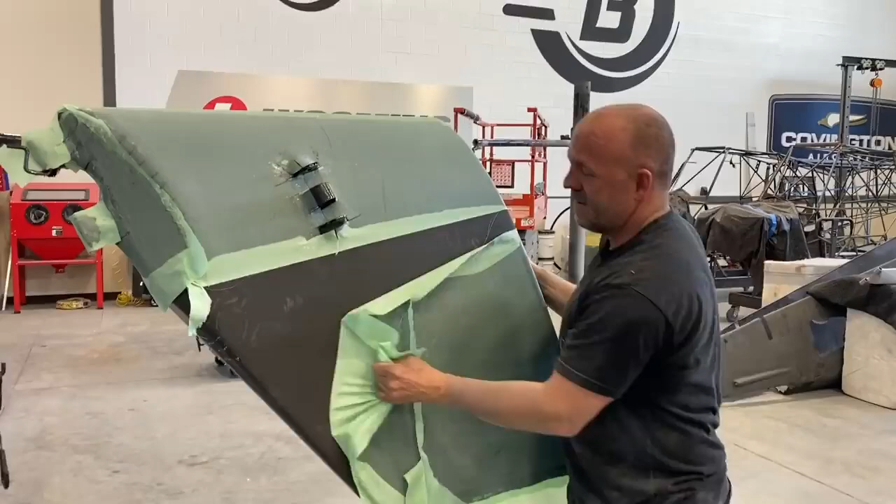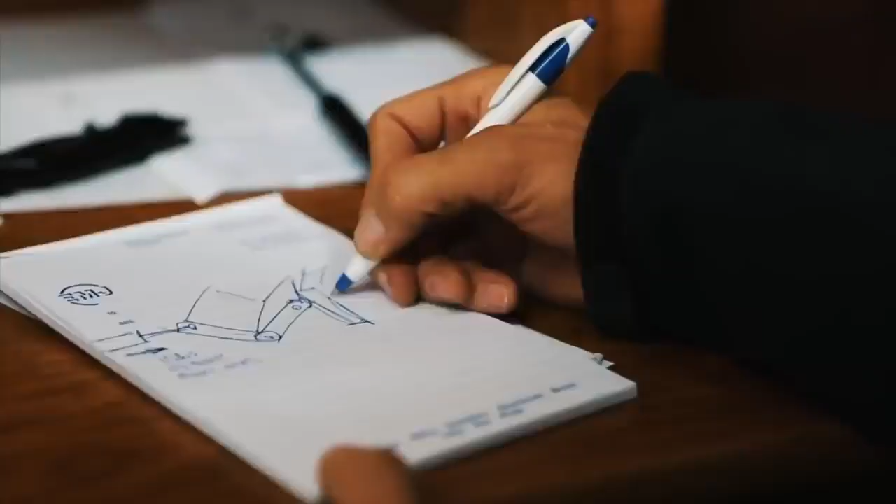This is oddly satisfying for me. It's physics, math, and engineering. Machine it, draft it, build it, test it, break it. Every time something new gets built, the entire world advances. Laying in bed at night, it's designing new parts, designing new suspension, designing new wings.

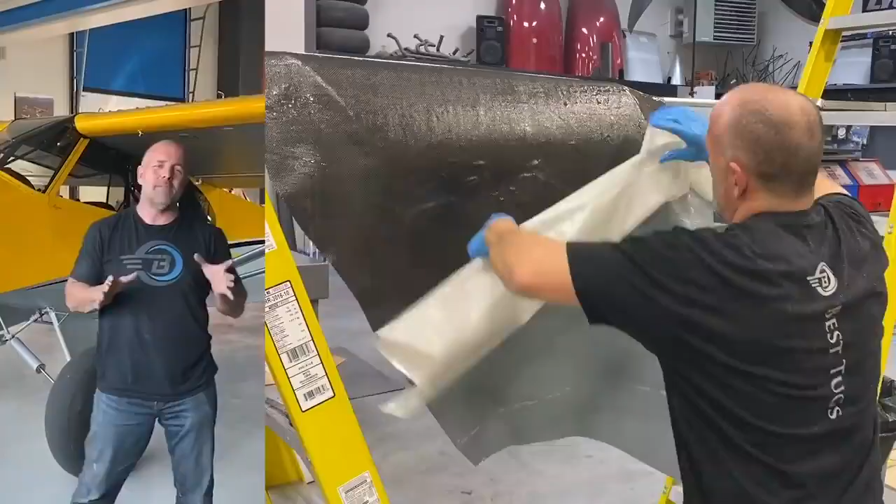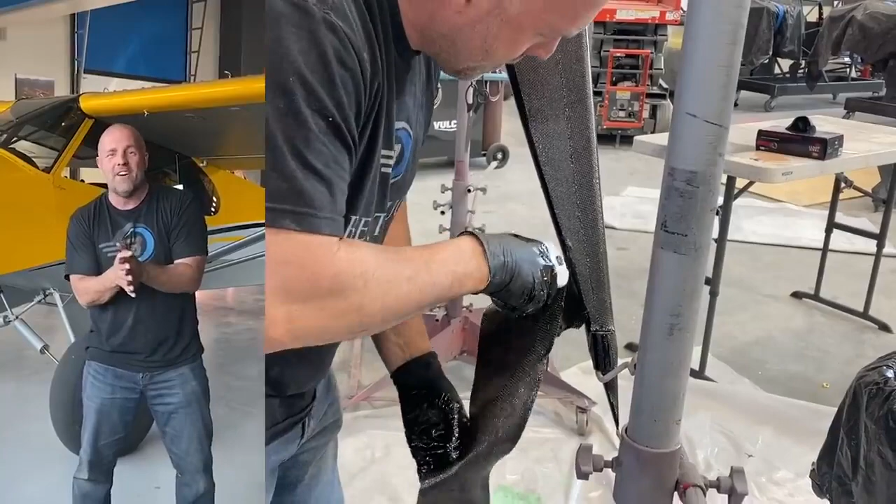Okay guys, right here I'm gonna jump into finishing up some really crazy little mini wings on the front suspension of my Scrappy Cub build. So I finished part of the shape and foam and sanding in a video a couple weeks back, so if you haven't seen that, go ahead and jump back and kind of catch up. I'm gonna pick up where I left off, get these wings built and installed.

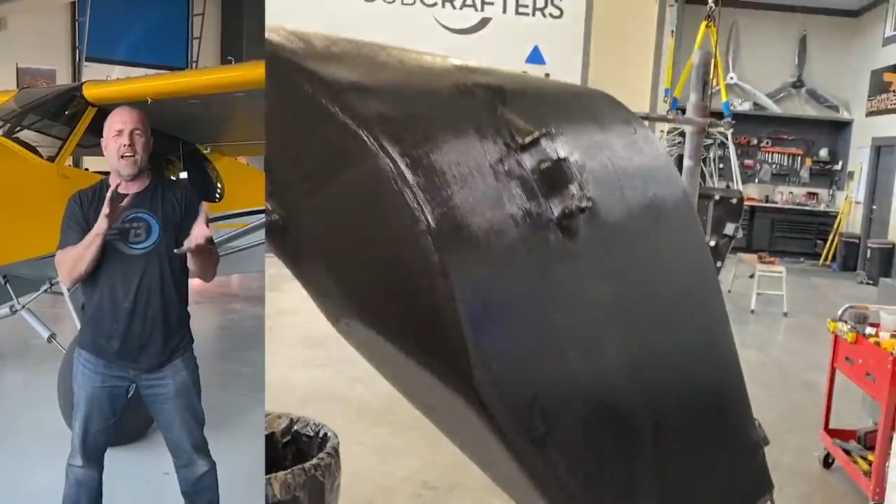Along the way, I'm gonna apologize in advance. I kind of got behind on these videos, and so they're gonna kind of jump around. I'm gonna try and keep them in a little bit of order, but I was painting parts while I was doing other parts, and other parts weren't painted, so there's gonna be a little overlap of stuff you'll see that hasn't come out in a video or was in a past video. I hope you can bear with it, because we'll get through the next couple videos and they'll all come back together. So I hope you like it. Let's get back to work.

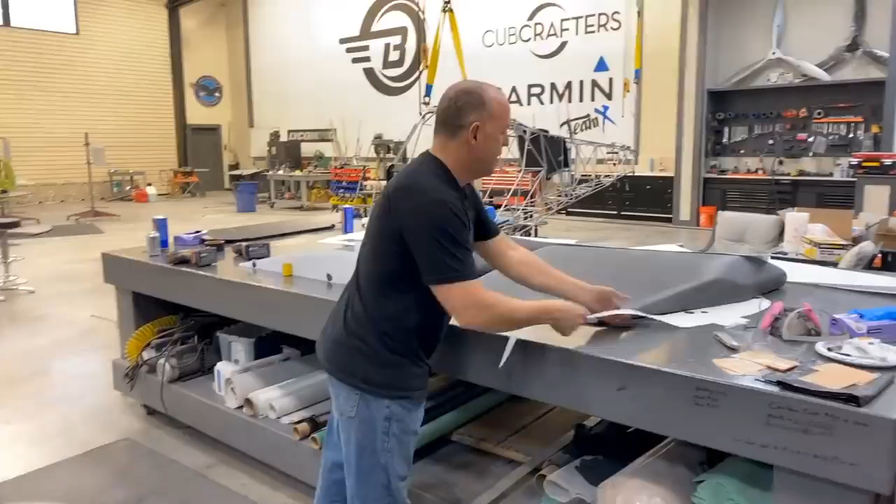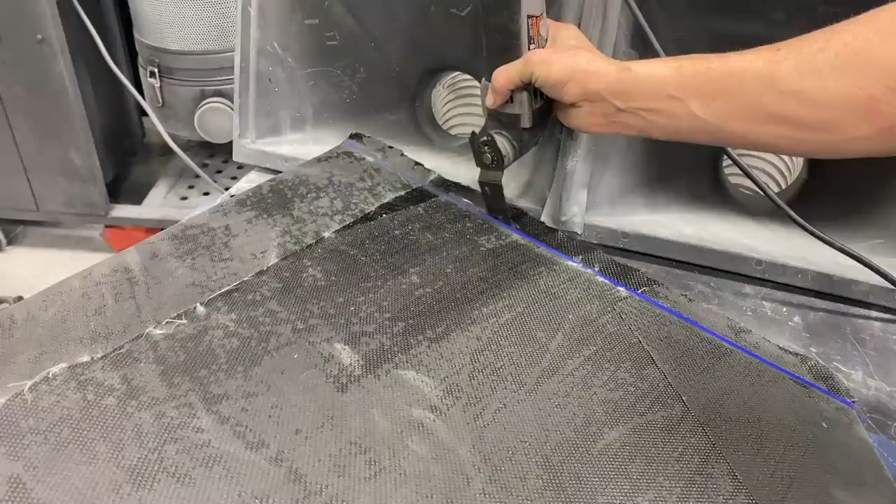All right, guys, here's my mini gear leg wing, airfoil. I'm really excited to have little mini wings. Anyway, I've got to get them trimmed out. I've got to put the metal frame inside these wings now for the shock mounts and the tire mounts.

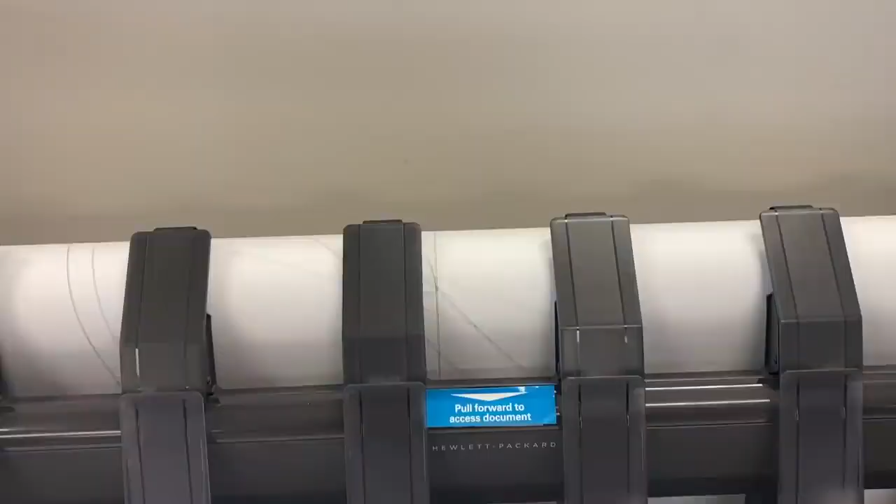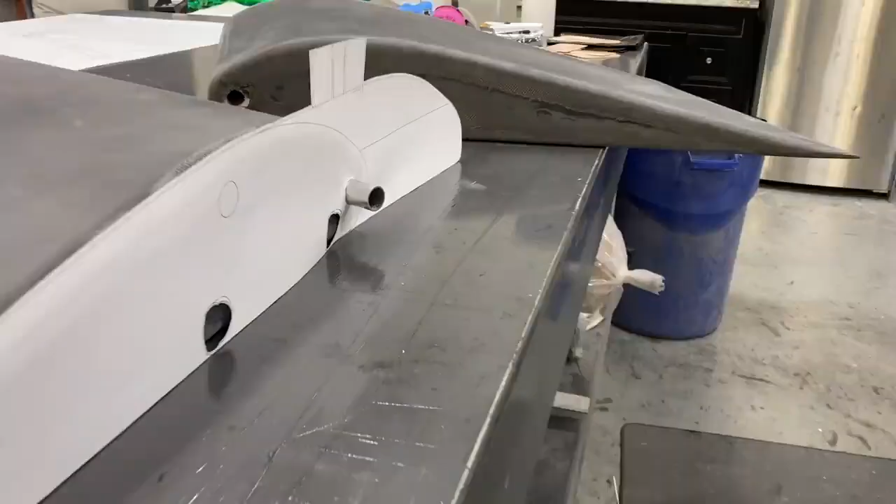Since all of it was done in SolidWorks and I 3D modeled it all, I can now make templates. And this paper I printed out is absolutely exact. I cut it long, but the bottom I cut exact. It's got the pass-through bar I used to hold the plastic foam still going through it right now. And then I use that as my alignment to drag the paper tight and mark it. This is kind of a funny shape, because there's several bars coming into one location here, but I can see each one of them. That allows me to cut a hole and then use a Dremel and chase every one of those funny arcs exactly for how the metal will pass out of the carbon fiber mini wing.

So I've got a template for this side. This looks a little funny, but if you think about a computer, it 3D models a flat plane. So this line is this side of the wing, but since the gear leg is raked forward, this line is actually representing that side in a perfect 90-degree plane. So this is showing kind of an angle across to the back. This is representing the shock mounts, but when I put a template on the other side of the gear leg, I can put a line between the two and the shock mounts will be here. I could get it pretty close that way, but not absolutely perfect.

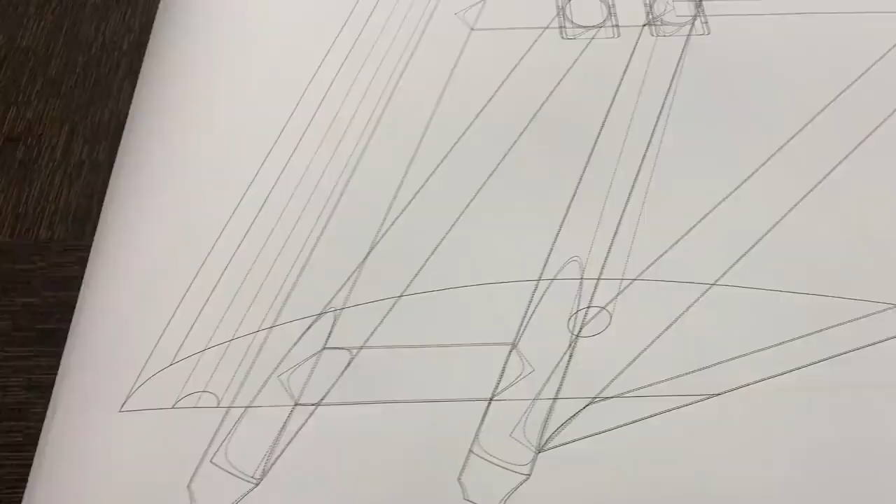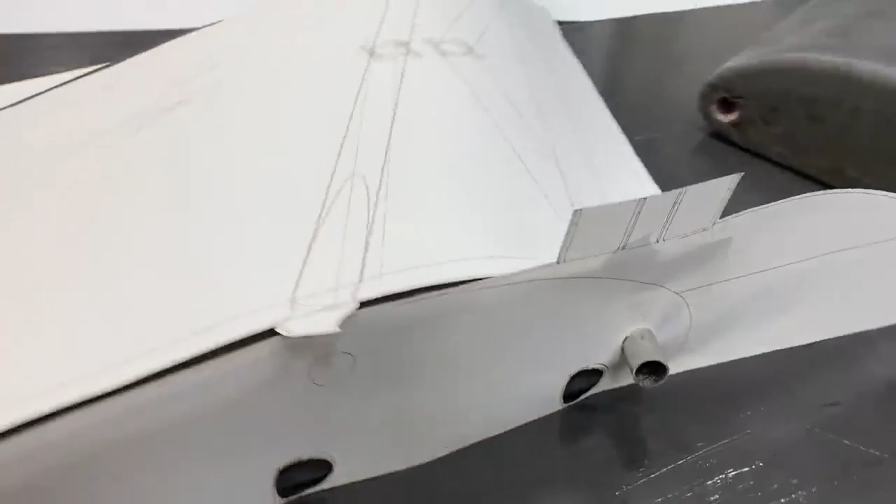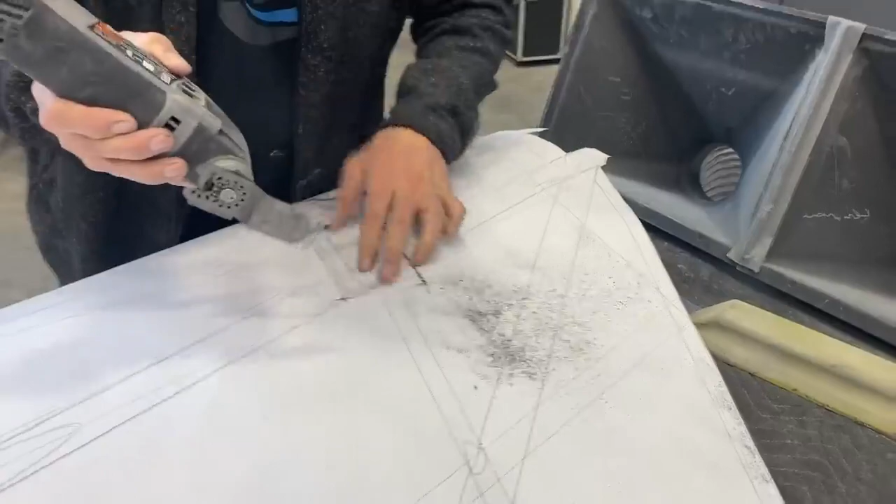So I've got another template. This one is top down, showing the metal frame inside the mini wings, so that I've got the structure for the shocks and the gear. What this is showing are the bars that pass through, the holes you saw on the other template. This small side of the wing where the tire is has two pass-throughs, but you can see here my shock mounts. So I'll cut out this paper, and it's already designed and arced. When I lay this on the carbon fiber, instead of doing a flat plane looking straight down, I actually did a contoured plane. I can set this right on the carbon fiber, trace it around, line up the back edge, the front edge, the two sides, and exactly cut out these little squares where the King Shock perches come through the mini wing.

So I got that template, a top template, and a bottom template. I'm going to cut them all out, start punching holes. Once I get all the holes exactly oriented, I'll split the two halves apart, pull the mold out of the middle, and clamshell it onto the metal frame of the suspension. I hope that all makes sense. Anyway, I'm super excited, everything is fitting perfect. It doesn't always go that way, but today it's going that way. So let's get back to work. Hope it holds up.

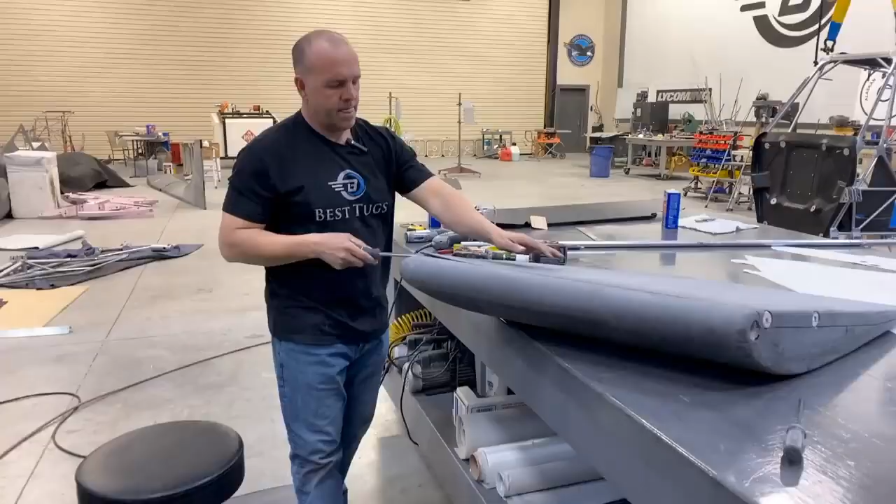That's oddly satisfying.

Oh my goodness, it's gonna get really stormy. You can hear the thunder already.

What are you making? A mini wing. Somehow I got to magically blend steel into the middle of this chromoly, but it's not working.

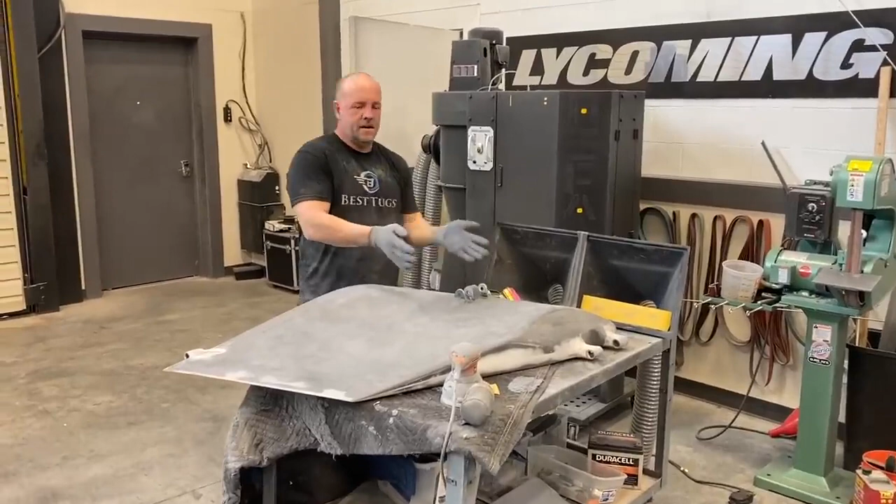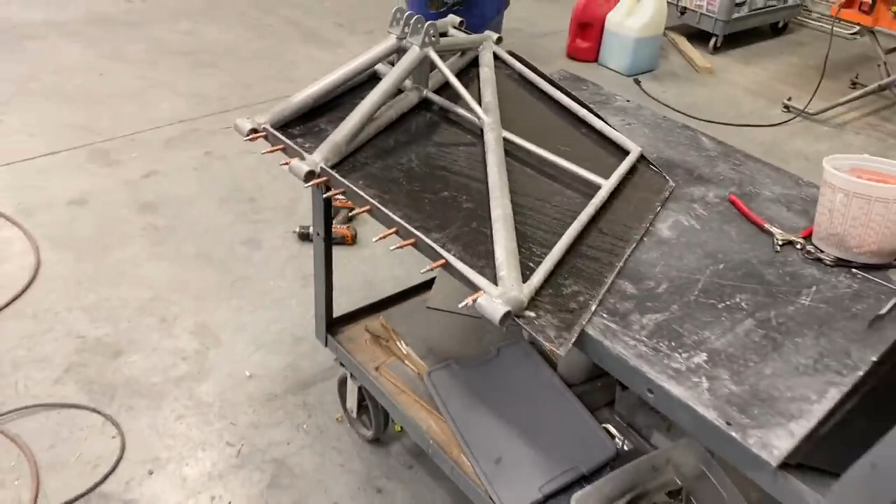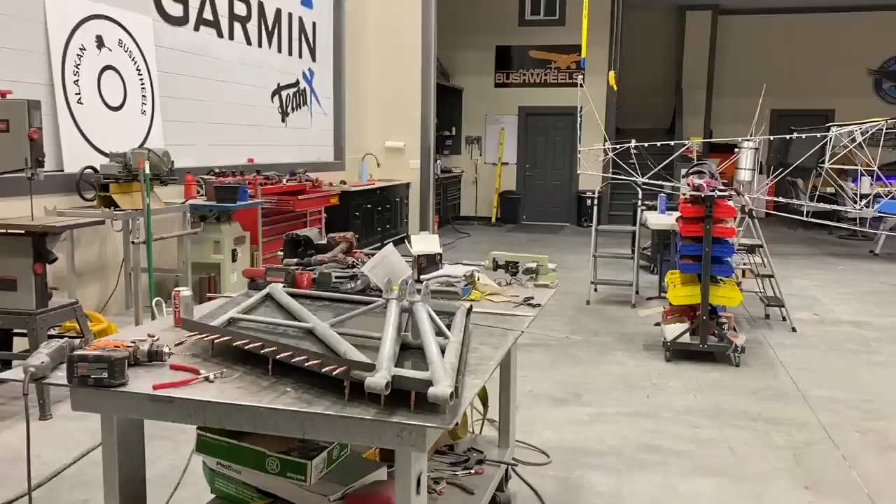All right guys, I've got one done. So what I did is I split it, opened it up. If you look at this end, you can see where the seam is right here. And it's got, what's great, just a trace, really thin, of micro filler to close out that joint. I've got all the sanding done. I microed all of this and sanded it back down, and sometimes you get lucky because you'd think you'd see traces like this. This little place is where all the clecos were that clamped this end back together. So there's a little bit of wave right there, but out in the field it turned out perfect.

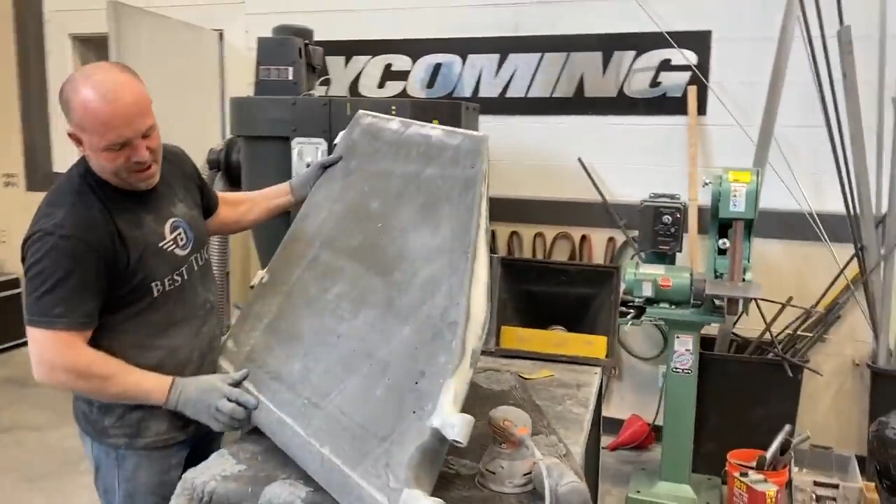The front, same thing. There's no micro left, even though I glazed it all and sanded it all off. The bottom, same thing. The seam was right here. Got a little bit right there, but for an all carbon fiber one-off part, that's probably up there in my top 10 least amount of micro left over after sanding. So I'm really happy with it.

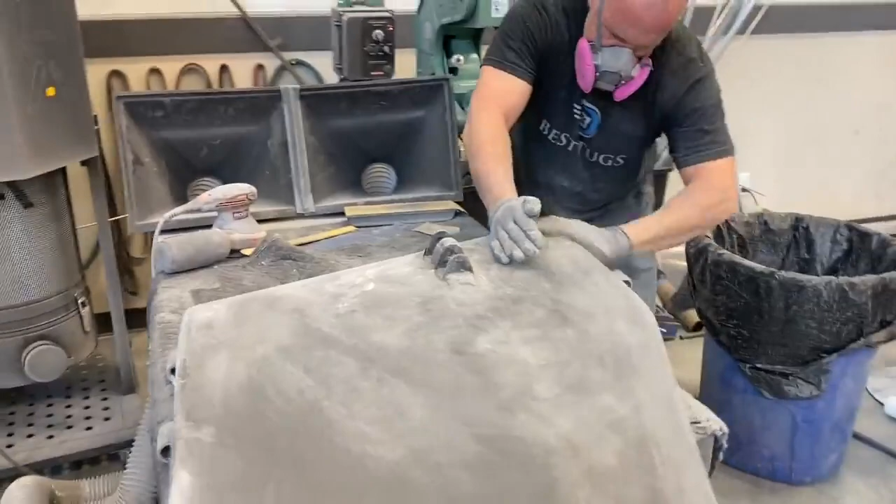It looked so cool when I got it all wet and wiped down that this was going to be a silver part, silver metallic paint. But with all these lines and these crazy rounded curves and shape and the top here, it just looked too cool in carbon fiber. So instead of adding primer and sanding and then building up and painting, it's flat enough, I'm gonna go straight carbon fiber.

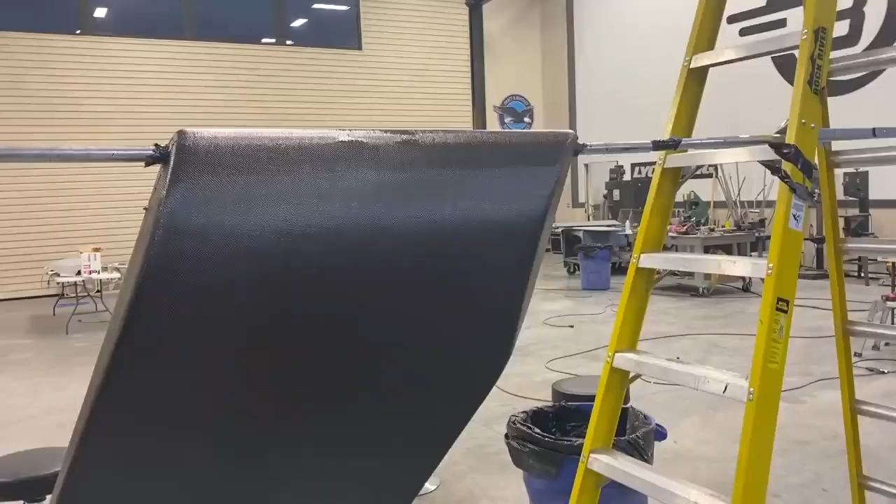So I'm gonna add carbon fiber, 2 layers, on the edges where I have a seam joint. And that seam, by the way, I made an overlap, so they actually overlap and tongue and groove together. So I've got a big plate on the back side of that joint, so that's really a solid joint, and that's all the way around. I did an overlap like this. But I'm gonna go ahead and add 2 layers of carbon fiber to the edges where the seams are.

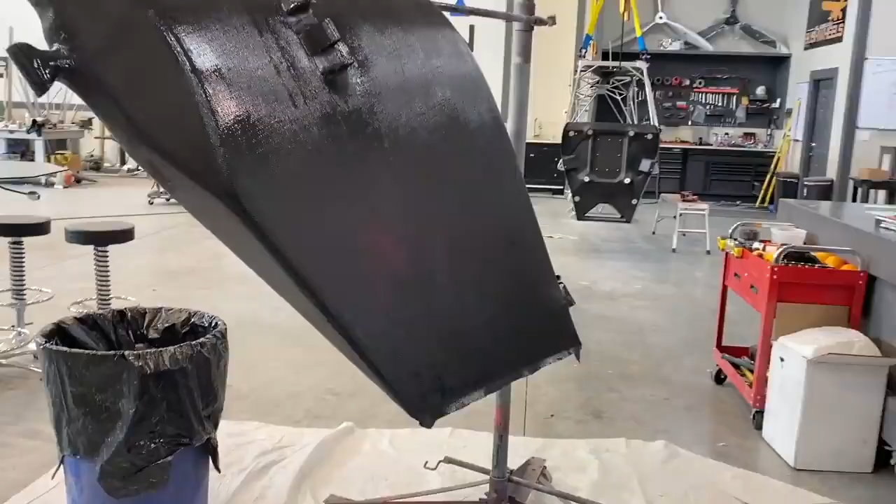And then on the top, I'll add one perfect giant piece, same to the bottom. This little trace of micro here and there is gonna be buried underneath those layers. So then I'll clear coat it, wet sand it, and polish it, and we're gonna see all one carbon fiber part. So it should turn out really good.

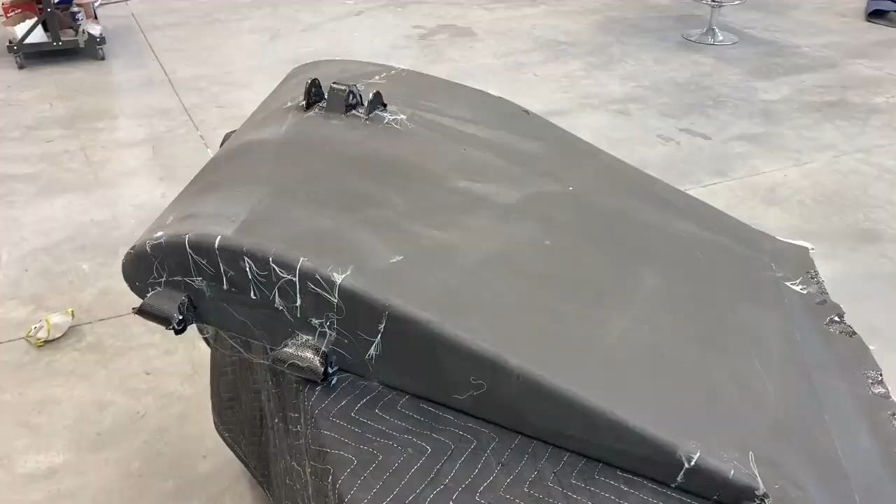I left all this carbon running long over all the parts, and we'll sand that off later, but let's put on some peel ply. The other one's already dry, sitting over there, totally done. So I'm gonna go do finish sanding on that while this dries up. I'm gonna try and shoot some clear on it in the next day or two. So lots to do, back to work.

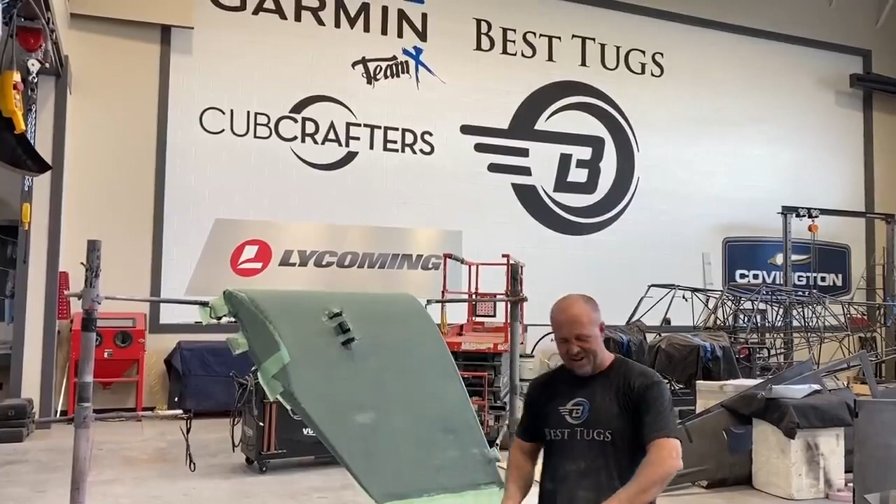All right, I've been sanding for a couple hours straight, carbon fiber, over by my little air vacuum to keep it out of my lungs, and wearing my mask this time. I'm doing better.

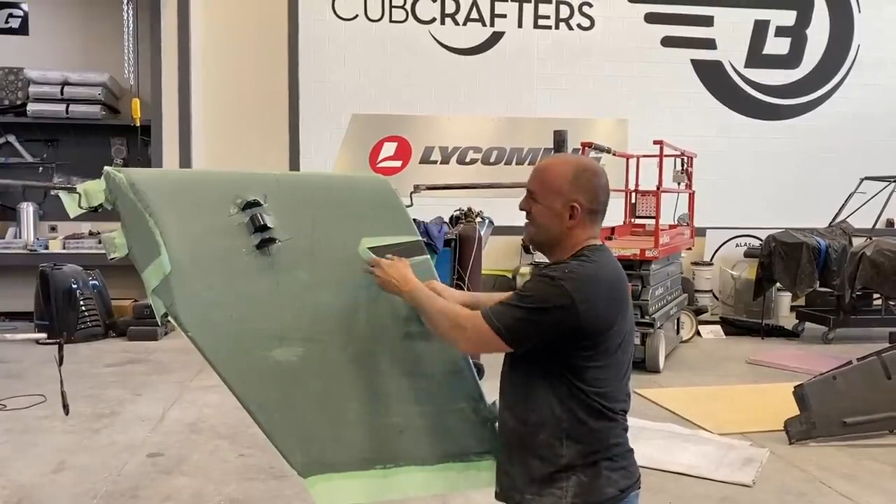Anyway, I've been sanding on the other side of my mini wing gear leg, and I needed a break, so we're opening up a Christmas present. Yeah, we'll get a big piece here. Oh, that's oddly satisfying.

That turned out so good. I think about 5-6 hours sanding on this one. We got maybe an hour left on that one over there. We're gonna be ready to put clear coat on it, so I can't wait to see how this looks. It's got so much shape to it, so I don't know, back to work.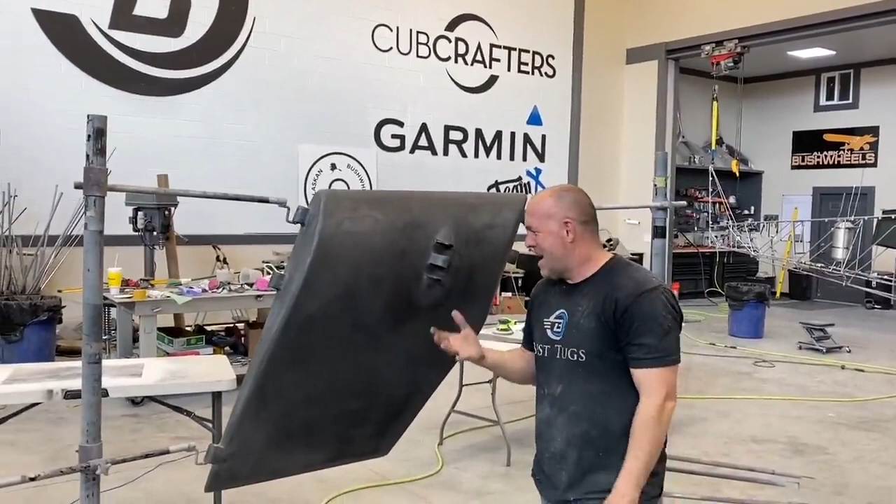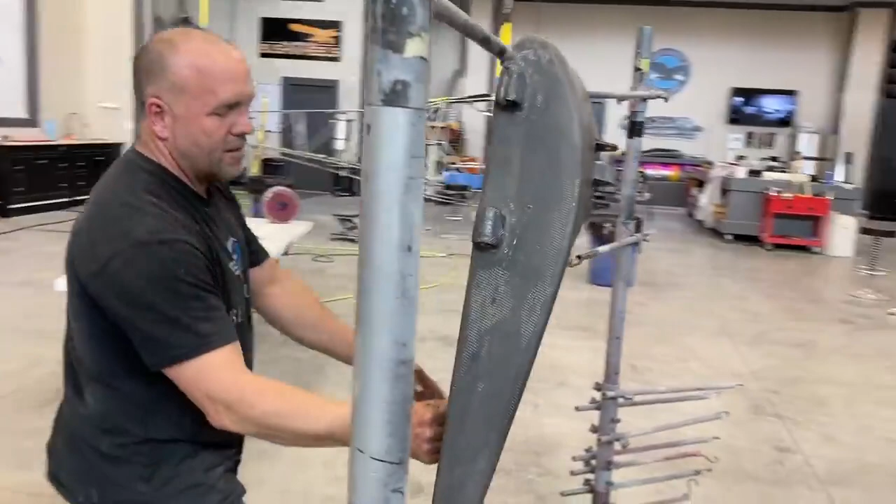I'm super pumped right now. I'm about ready to spray clear on this. It's all sanded. Man, it is a big job sanding carbon fiber. It's such a tough material, but it turned out really cool. I was able to put all the seams on the backside, so this top is one giant wrap. And so I'm really excited to see the movement of the carbon as it twists around the corners. It should be a really cool look, but you can walk around, see the whole thing. A little dust, I got some alcohol, clean it up, but man, it turned out straight. Let's put some clear on it and then get it on the airplane.

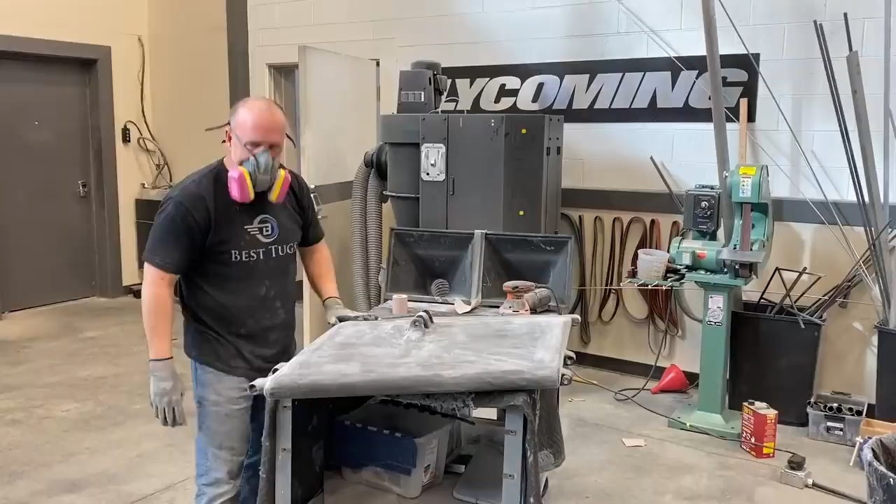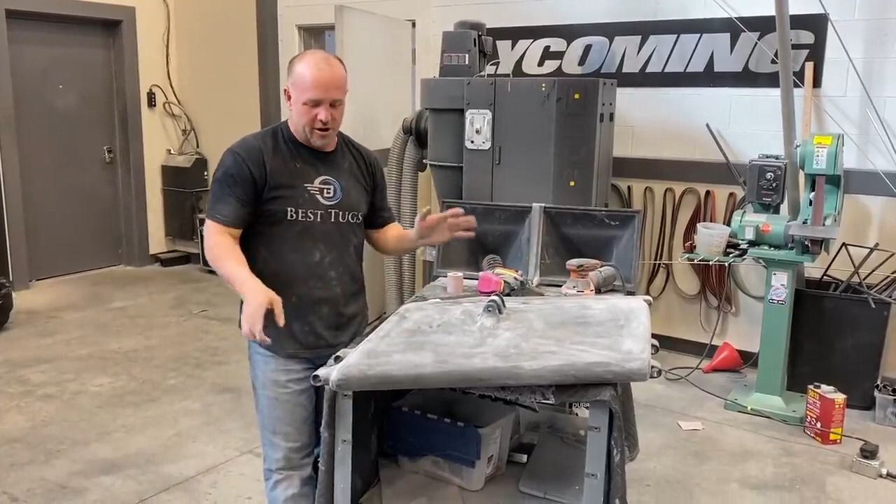Get close. This part, I'm really proud of it, but it is a pain in the butt. I've had to, between putting the metal frame inside and all the mold work and all these funny angles, it's just very time consuming. I wouldn't say it's hard, it's just taken a ton of time. But one of the challenges, because I don't have any room for any error at all, it's not like I can have a dimple and then just fix it with a little body filler. It's gotta be perfect. And I feel like it's gone really well.

I actually didn't need anything other than, I've had to sand it and then put a clear coat down and then sand it and use the clear kind of as a prep body filler. And it's so much harder and hard to sand, and it doesn't work if you had any major imperfections. So fortunately, this one's worked out. You can see kind of what it's gonna look like when I get it all clear coated again.

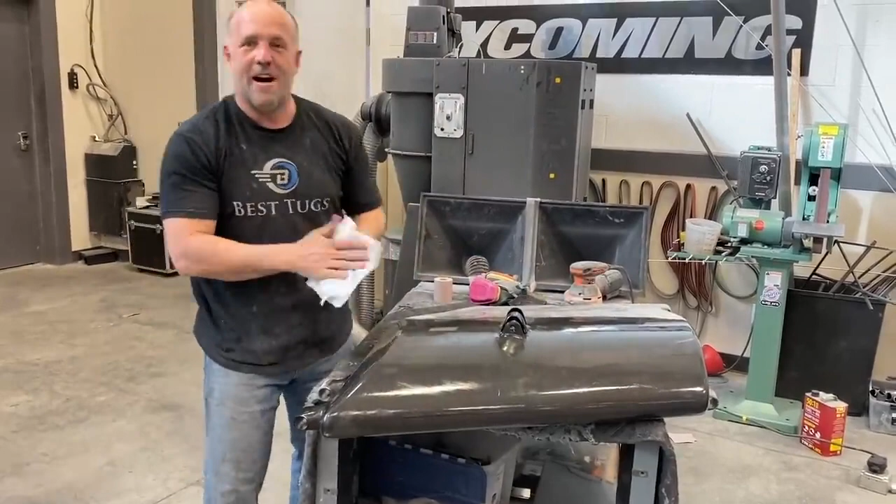I'm really happy with it. But I tell you what, paint is like 1,000 times easier. Sometimes when I'm into it 10 hours straight sanding, I feel like I wish it was just paint. But when it's done, I think it's gonna be really cool being just raw carbon.

Hey guys, this is my first part for Scrappy in a mirrored finish, and I am way pumped. It turned out so cool. I love doing mirror finish on carbon, and this one, I don't know, I'm pumped. I guess just because it's the first one for Scrappy that's now done. I got a lot more to do, so let's get back to work.

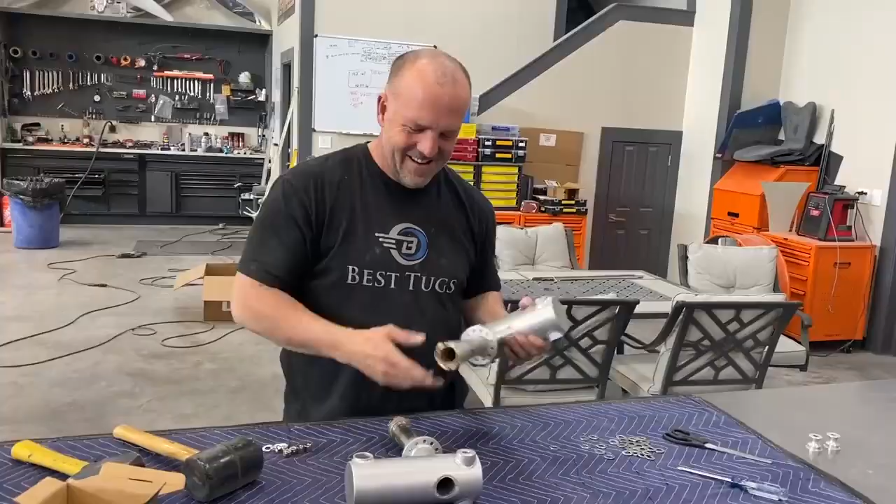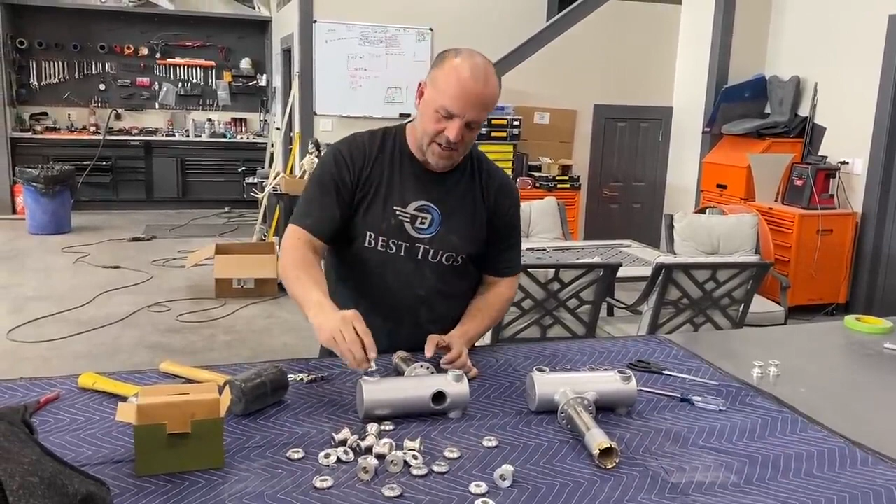All right, guys, so here's the parts we just made. Got this little hourglass shape to it to save weight. And the tolerance is just enough. It should just tap right in with a little friendly persuasion.

Like that. And the reason I've got this done both ways is I got a 1/2 inch bolt going through here, and I just want to stabilize it rather than just out on the outer edge, here and here, for the long bolt that goes through for the gear. I wanted to have it have multiple contact points, so it's going to stabilize with this inside, outer, inner, inner, outer. So there'll be 4 contact points on that bolt. It just eliminates the amount of vibration and play. And anyway, perfect fit.

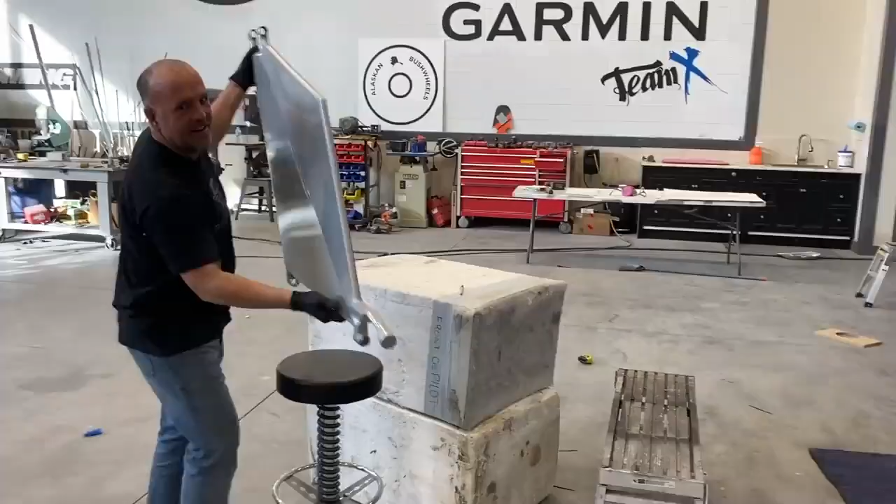One down, one to go. My first A-arm is going on. Could not be more excited. There's so much work to get to here. I gotta put the little...

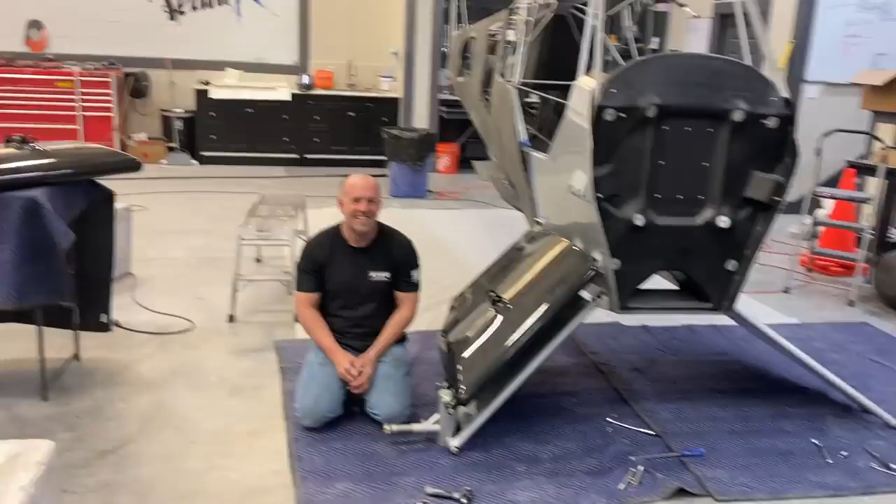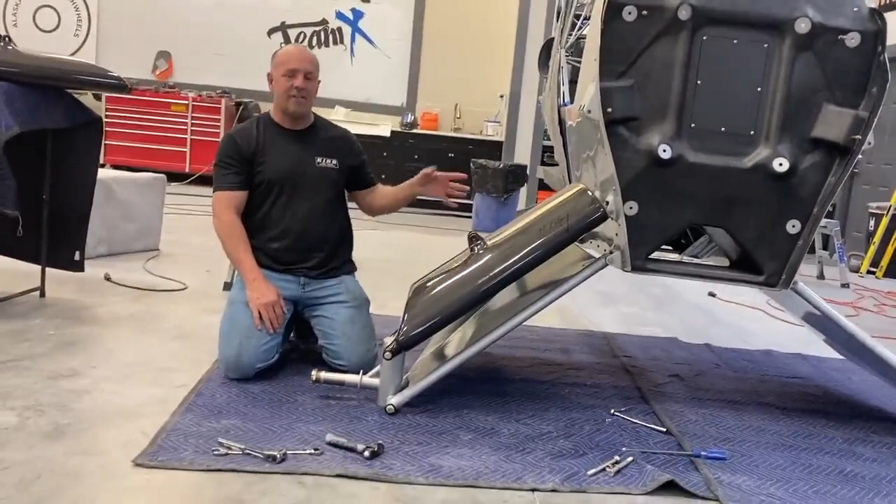All right, guys, I couldn't be happier. I just tightened up all the bolts. I still got grease coming out everywhere. I built this with virtually 0 tolerance on everything. All the welding was in a jig. Everything was machined to fit. Every tab on the airframe, I machined spacers to hold them as I welded them in place. So it went together all with a gentle persuasion of a tiny hammer to just align the bolts, and then they just slid right in.

But what's really awesome is look at this travel. And if I grab this and try and wiggle it, even though I got a 3-foot leverage arm out here, I can't get any movement at all. I mean, absolutely zero play in this suspension at all. And also, if you look right here, see how the axle stays level to the ground as I go up and down? You can see this knuckle travels through this arc. This arc was all designed in the computer for the carbon fiber, but the axle stays perfectly level relative to the travel. So what that allowed me to do, typically a Cub has anywhere from 5 to 10 inches of travel on the suspension. But as the travel goes up and down, the tires lean in and out because the axle is fixed to a single A-arm and welded.

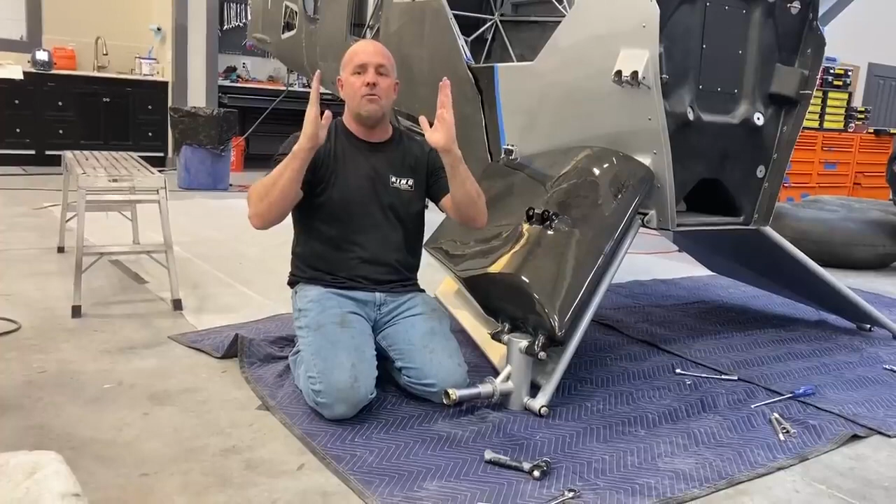It gets welded at neutral stance, the average placement you'd normally have it. Then anywhere on landing, it would either be leaned this way or that. Also, depending on how you adjust your suspension for that day, the tires will lean.

What I wanted to do was get 20 inches of travel, and I ended up with 20¼ inches of travel while maintaining the tires level. What that does is rather than the tires tucking under the plane at 10 inches of travel, at 20 inches they would actually lean under the plane like this.

If you landed, instead of the suspension trying to move, there'd be too much scrub force, and the tire would actually just fold inward and try to pop it off the rim or tear the tire. At 20 inches of travel, the tire would literally be landing on an angle and fold under itself. So to get the tire straight, I did a twin A-arm design so that no matter how much travel, the tires land straight and don't have to brush outward and fold the tire as it travels.

It was a lot of work. I can't wait to give it a shot. I have 20 inches of travel, 20¼ not counting tire movement, all in suspension only, while still maintaining a half inch more prop clearance than a conventional Cub at full bottom out. Even though I've got 20¼ inches of travel, I used that baseline of bottomed out suspension as my guide, and I moved upward to make that happen.

That's why the frame had to go so low, so the A-arms could stay flat and not lean so steep. Because you have a second problem: if the suspension's coming down really far, not only would the tires be tucked under, but even if you kept the tire straight, if the suspension came down at a steep angle and you hooked your shock to it, when you landed, the suspension would jam the frame and have very little pressure to push out on the shock. So you'd end up loosening the shocks so it could move, but you're still going to get that first impact load jamming the frame if you have steep A-arms.

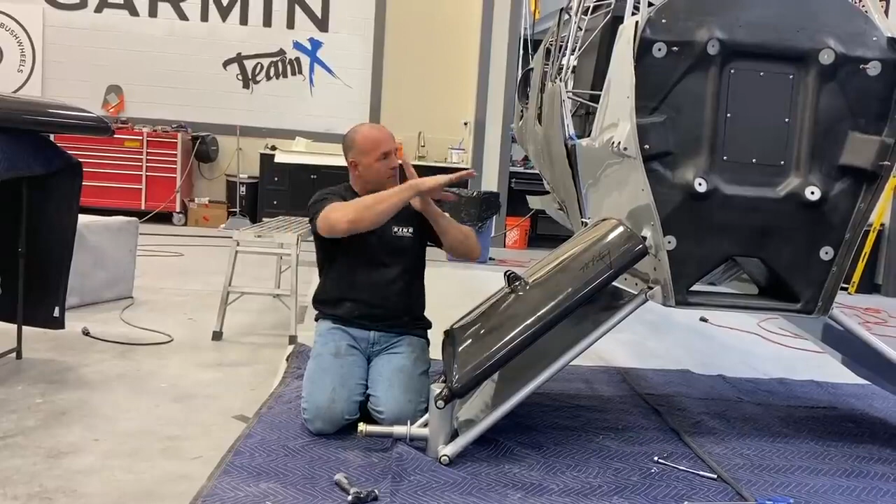So what I did is I dropped the belly of the plane really far and made it into a belly pod with a chromoly sub-frame in it. That took the A-arms from steep and leveled them out, and that's what gave me the extra room to get 20 inches of travel while maintaining the correct angles for the shocks to work appropriately.

So, that's a mouthful, huh? I hope it makes sense. I'm way excited, really works great. Let's get the other side on. The only thing I can hear back there is some loose cables that aren't hooked up, but I'm pumped. Let's get back to work.

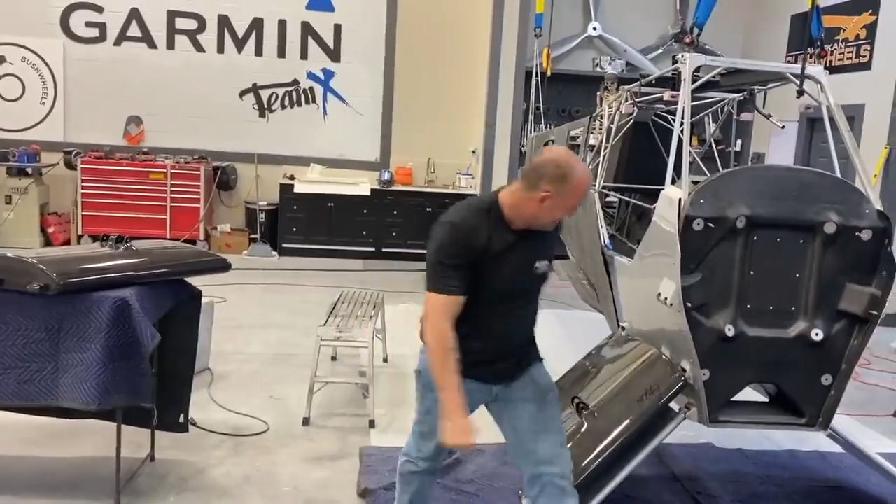All right, that's 2. I couldn't be happier. So now I get to do something extra fun. I purposely put on this shirt because now I get to put on these shocks.

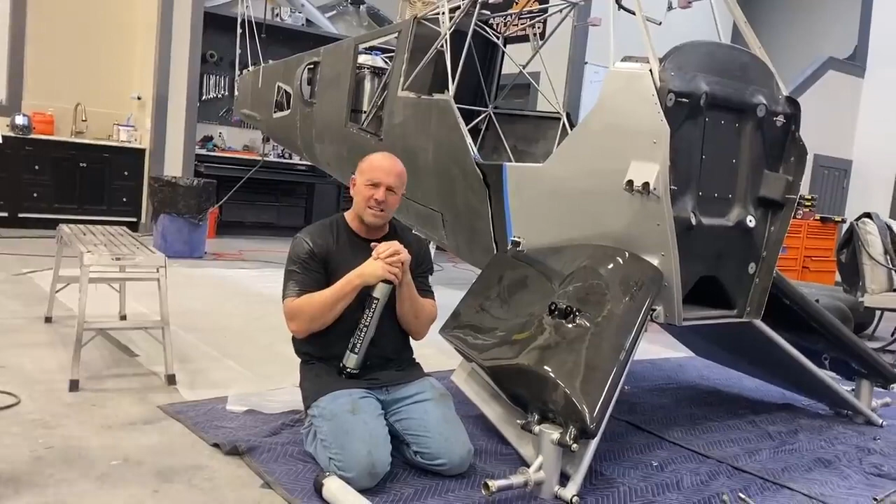I tell you what, King is awesome. I've used them in off-road desert racing vehicles I've built and hill climb machines. I called them up and told them about this Scrappy project and I needed something custom done. I'm not going to tell you about that part yet, but we did something extra cool with the King shocks. The engineers got on the phone with me and they were so awesome, and we just dove in, went piece by piece real quick about exactly what I wanted to do, something unique and different. We'll dive into that in another video.

But 2 King shocks aside, we're going to go ahead and put these on, then the brakes, some tires. So let's get this thing sitting on its wheels.

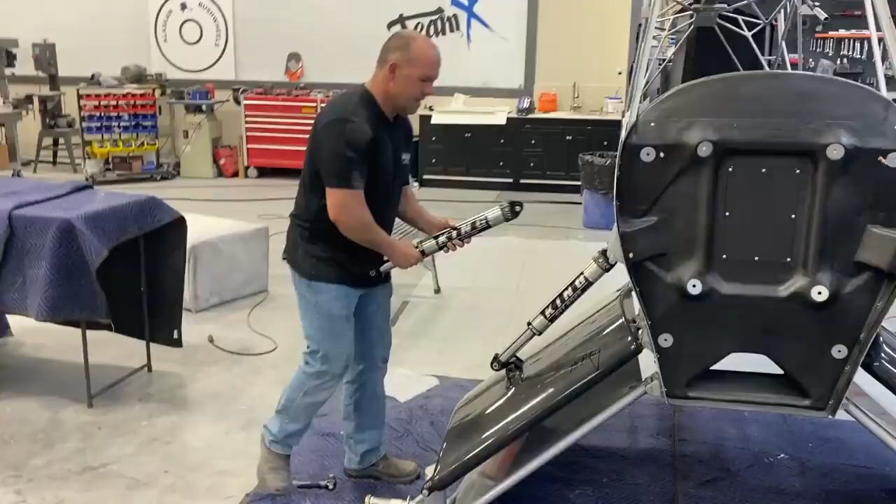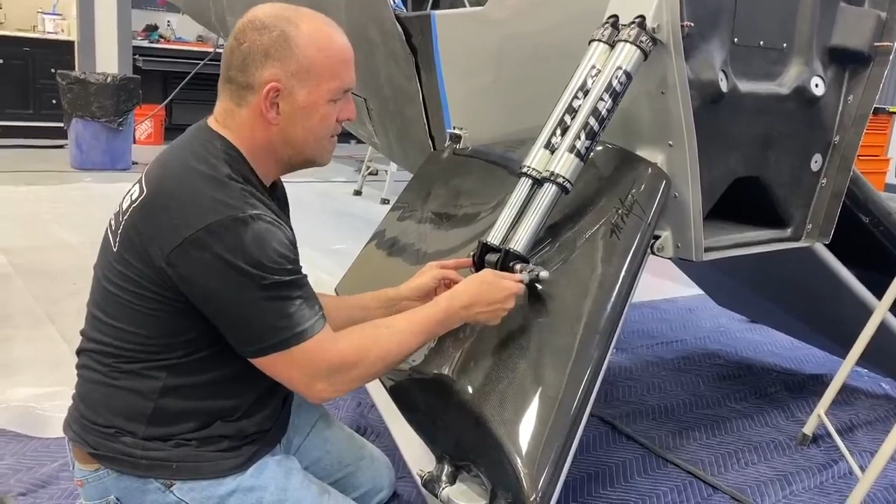I am so happy right now. Okay, I'll have to lift the plane up to get these in their little perches. One side done. Man, that feels good to get on there.

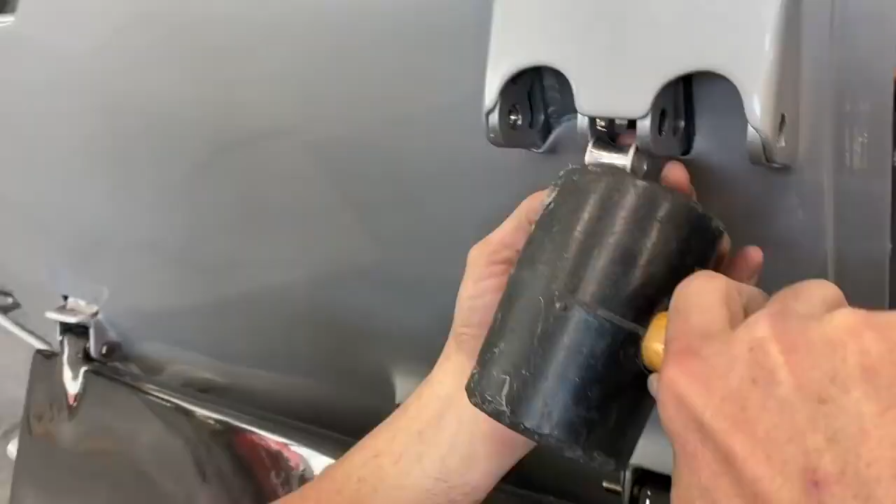All right, so I got another set of shocks to put on. I want to show you this little part I made. It's just little simple details, but this super lightweight aluminum part I designed to go right in between here. I'll just gently tap that in. What that allows me to do is put one bolt and cinch them all together without it trying to bend these metal welded-on tabs or brackets. If I hadn't done this, I'd have had to use some big steel bracket with a big opening. So these little details save weight, but I'll slide that in, put these shocks in, and we'll be done.

This is oddly satisfying for me. Hey guys, I am so pumped.

There has been so much work to get to this point, from machining all the parts to make the ends out on the hubs, the twin A-arm assembly, the geometry to make this angle tie into this angle. These bars are actually offset where they interact with this 3-inch pipe. The custom shock mounts, bracketry, wings, mini wings, foam work, carbon fiber work, fabric work, everything to tie it all together.

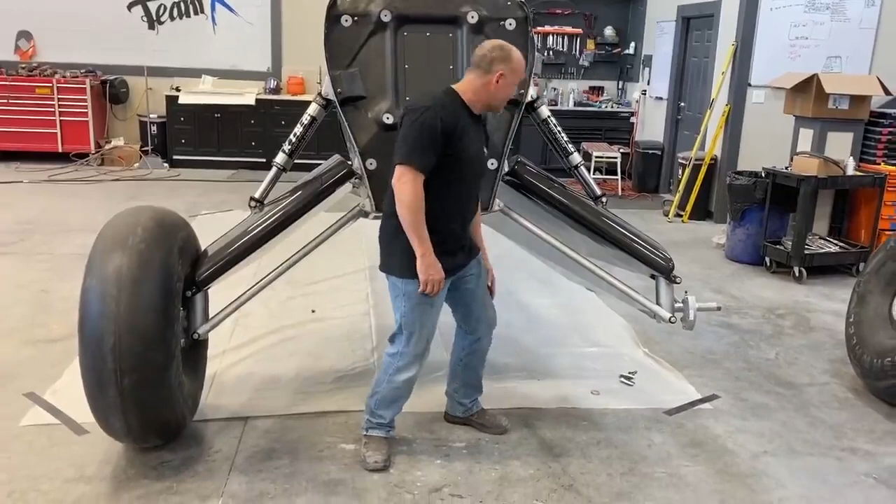It's been months of just things being done on the side, and then for the first time, bolting them all together. Everything was welded off in a jig and everything was machined separate, and the bracketry for the shocks separate.

The shocks weren't even here yet because I had King Custom make them for me, and they've got a really cool, unique feature. I'll show in another video. That is so cool what I'm doing with them.

But all the parts were done at different times and places. This is the time they were trial fit together, and it went together so good. I left this off so you can kind of see how some of this geometry works.

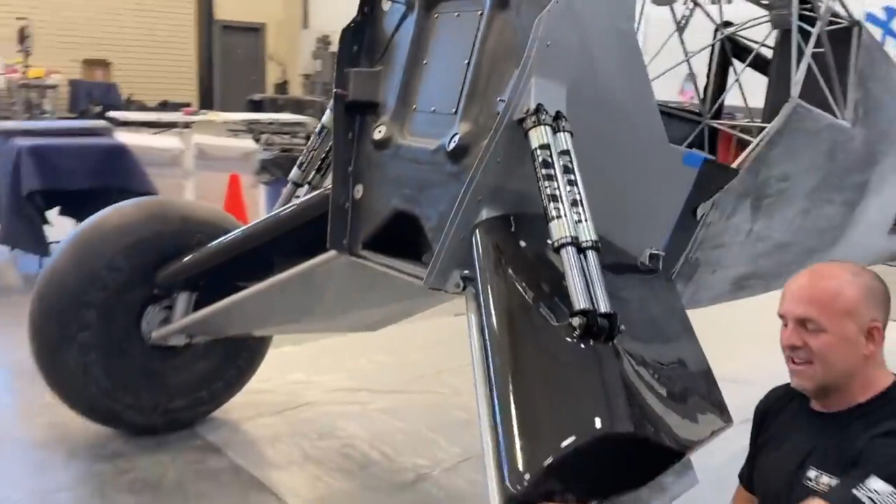Little details, carbon fiber wrapping down around here. You can see offset on the bolts - they actually don't line up. They're angled to match the angle on the aircraft so that when this axle goes up and down, it always stays level. But you can kind of see the clearance for the tire, this angle here.

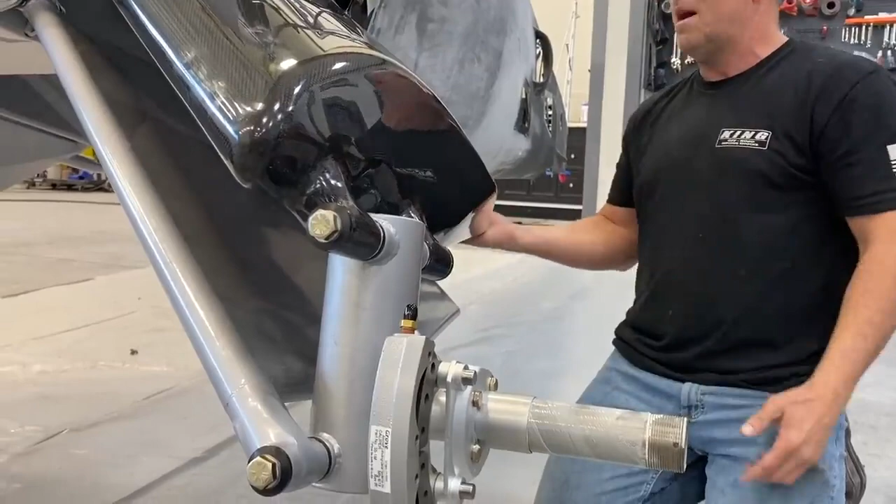This is clearance for the back of the tire and anything that might flip up. I gave it a little more clearance, raking away from the back wheel.

All the little parts, how they chase together, the inserts, the brackets, the internal giant W-web truss member inside the carbon fiber.

Holy crap, this is a ton of work, but this is the best day when you get to put it all together and see 10, 15 different things done at different times, slide together with the slightest tap of a hammer. It should be really smooth.

I can't wait to drop it, test it, fly it, run it over some big ruts out in the backcountry. We got a lot of work to do. Let's get back at it.

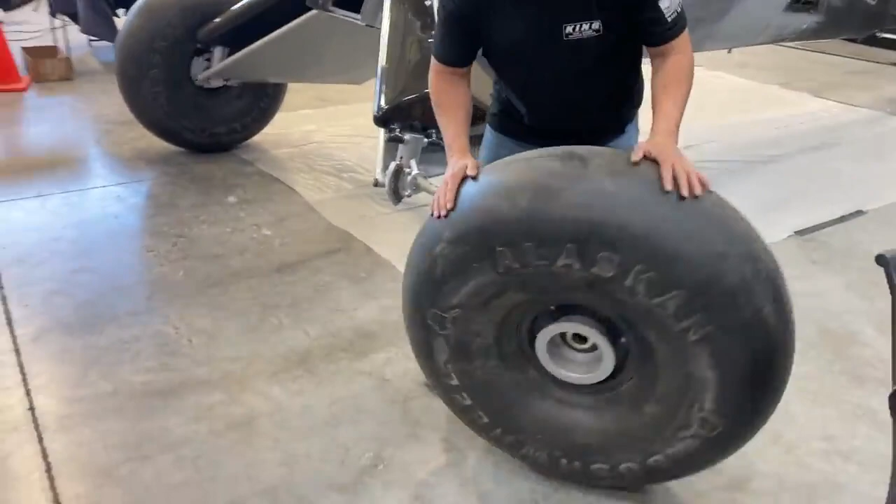One more tire to put on - Alaskan Bushwheels, 35s is what I'm putting on here. I love these things. If you aren't running Alaskan Bushwheels, you need to give them a shot. I tell you what, they suck up the rocks and bumps and let you go places you normally can't go. So I went with the biggest they have, 35s.

Airframes Alaska, if you wanted to make a set of 37s, 38s - no, 35s is perfect. Thank you for making those tires.

They're awesome. Anyway, we got a lot done, a lot more to do. I'm talking a lot because I'm just dang excited. Let's get to work.

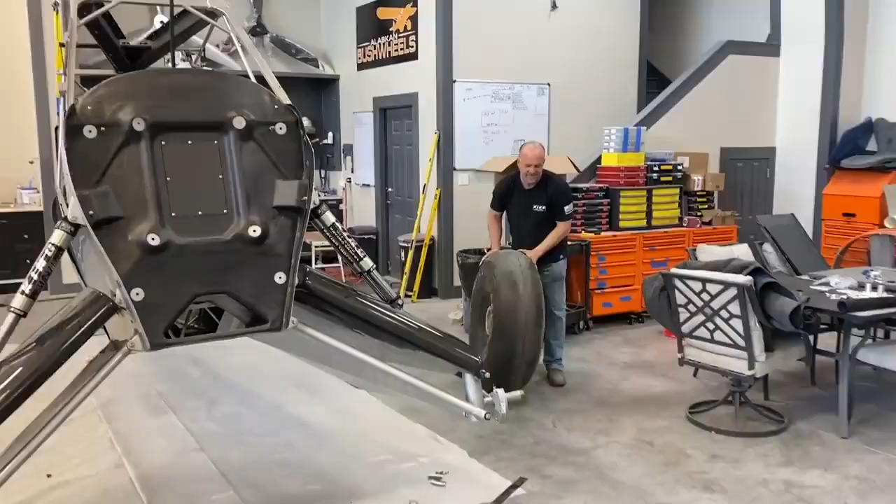Where did I put that?

All right, so this is my suspension test. Not really, the shocks aren't charged, but this will give you an idea of the movement.

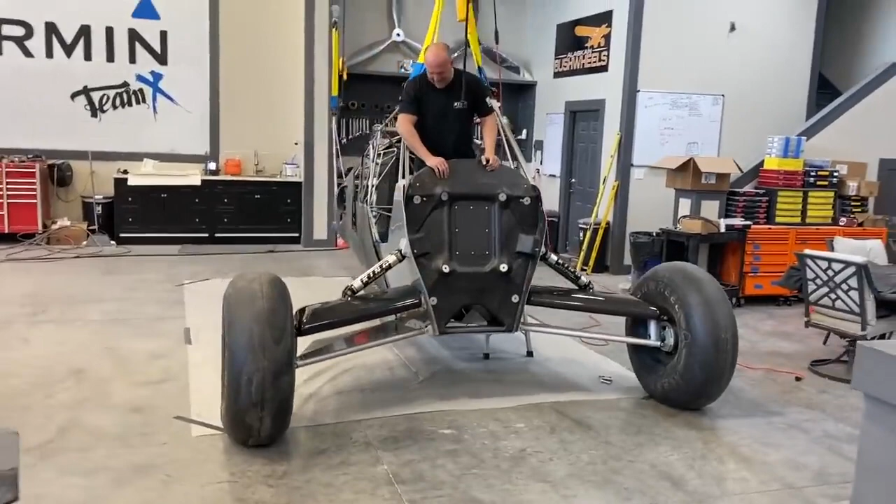That's my low rider stance right there. It just looks extra low because I dropped the belly of the plane so far to be able to do the geometry to make this gear work.

That's what 20 inches of travel looks like. Awesome, I can't wait to do some drop tests.

More importantly, I can't wait to get the plane done and go run it through some ruts on some backcountry strips, or maybe not strips, but some backcountry mountaintops that I've wanted to land on. And I built this to see if we can do it.